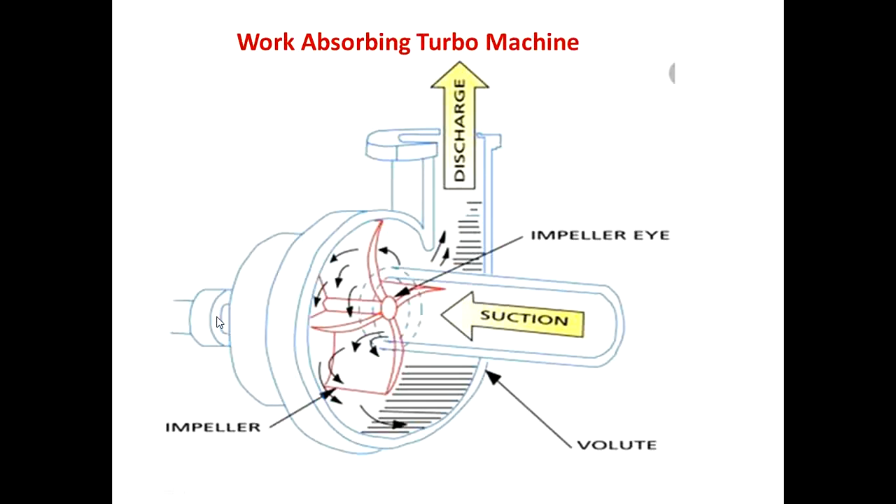But in case of a turbine, what happens? Fluid gives its energy and makes the turbine rotate. But here it is not the case. The machine element is rotating, and that rotating energy is converted into fluid energy. That's why it is called a work absorbing machine. Work absorption means absorbing in the shaft, work developed means work developed to the shaft. Here work is done on the fluid, that's why it is negative work.

This is the centrifugal pump sketch. This is a very important sketch, please note down this sketch properly. Pause the video and note down this sketch properly.

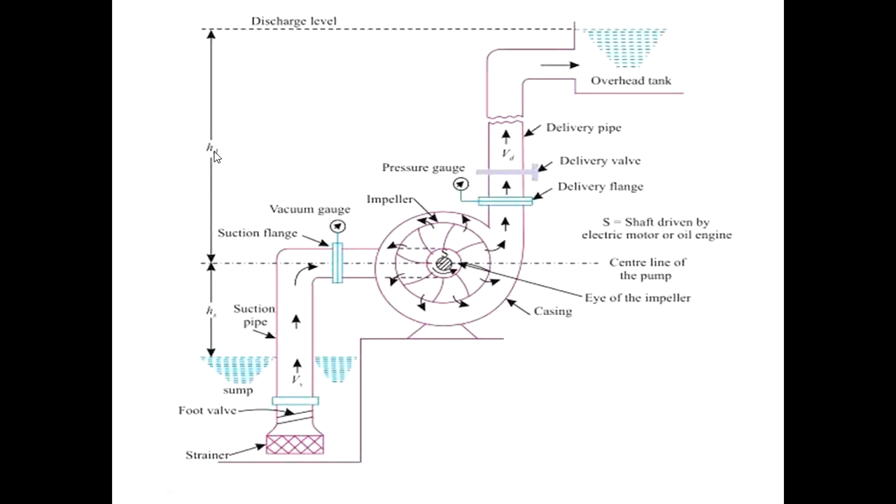It enters through the suction pipe. So up to there you have the water, this is the sump. Just observe this properly, dear students. Centrifugal pump is the key point to pass in examination. This is a very important topic, so you can pass easily, otherwise it's very difficult for you people. The suction pipe from the center of the eye to the tank is called HS, and this is HD, the delivery head. Note this sketch properly.

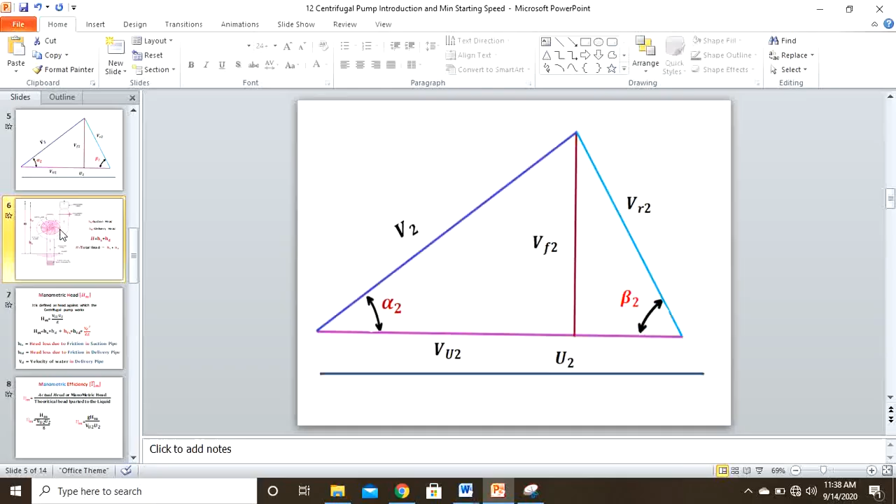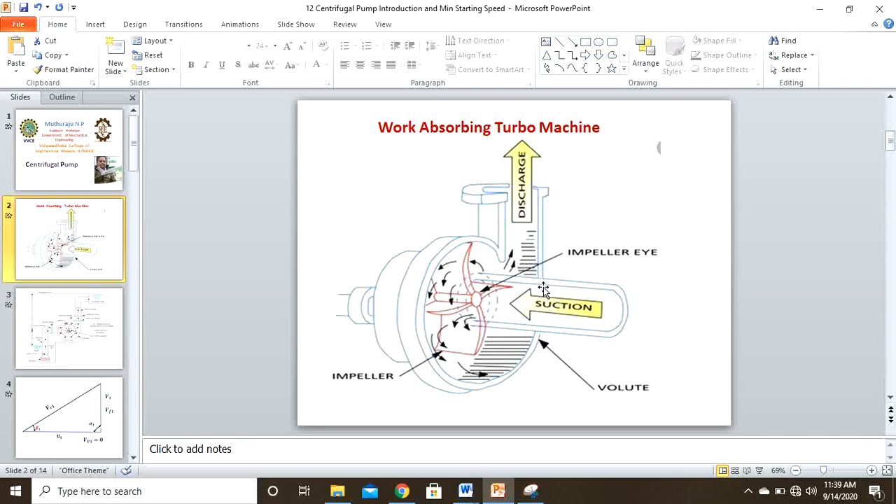This is the inlet velocity triangle, because inlet to the turbo machine, the suction is axial. Therefore this is axial inlet. Axially fluid is entering, that's why V1, the absolute velocity, is axial, and it will coincide with the flow velocity. Blade speed U1 will be there in this direction, both are at 90 degrees to each other. That's why this is the velocity triangle for your turbo machine. So alpha 1 is equal to 90 degrees, V1 is equal to VF1, VU1 is equal to 0.

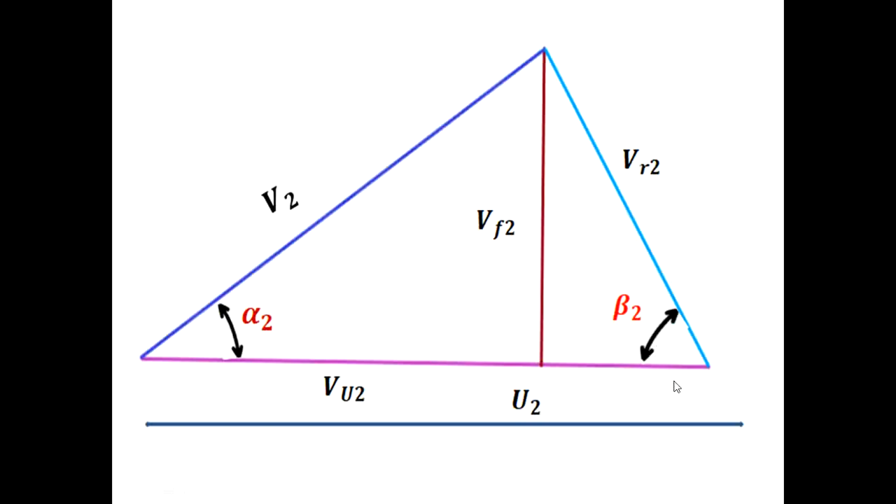VR1 as usual, beta 1 angle will be there, please note this one. U1 is the blade velocity at inlet. This is the exit velocity triangle, U2, the blade velocity at exit, is more than the inlet, and VU2 is less. So this is the exit velocity triangle with beta 2 angle. Please note down this velocity triangle properly.

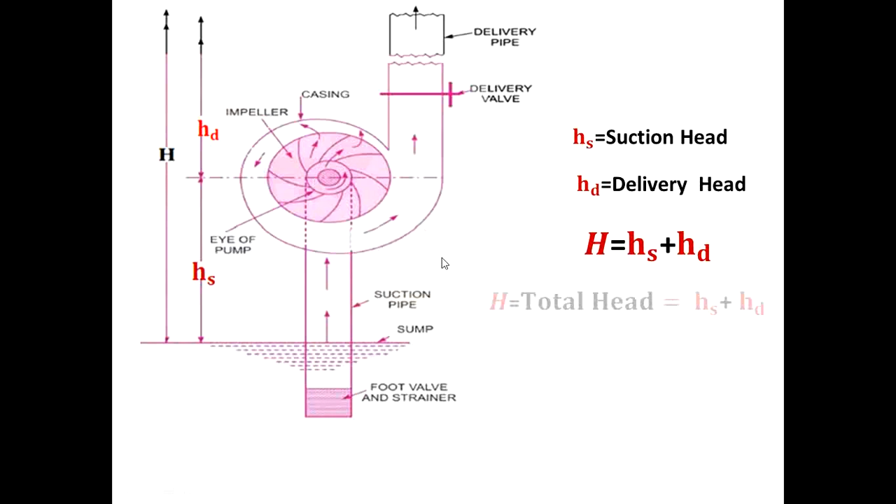From the point where you have the water up to the center of the eye, it is the suction head, above which you have the delivery head, up to here. Then your total head is equal to H: suction head HS plus delivery head equals total head. Manometric head is defined as the head against which the centrifugal pump works.

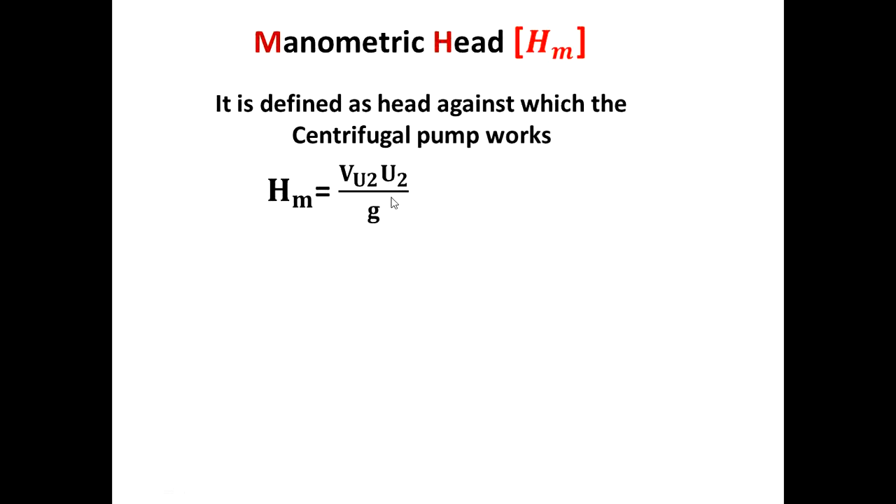Therefore your head is VU2 U2 divided by G. Sir, why is it VU2 U2 minus VU1 U1? In Euler's energy equation it's VU1 U1 minus VU2 U2, but here it is work done on the fluid, so it's negative work. When you multiply negative inside, it becomes VU2 U2 minus VU1 U1, but VU1 is equal to 0, that's why it is equal to VU2 U2 divided by G. This is the manometric head, you can write it like this also.

Another formula: suction head, delivery head, friction loss in the suction pipe, friction loss in the delivery pipe, plus velocity of the fluid at the delivery pipe squared divided by 2g.

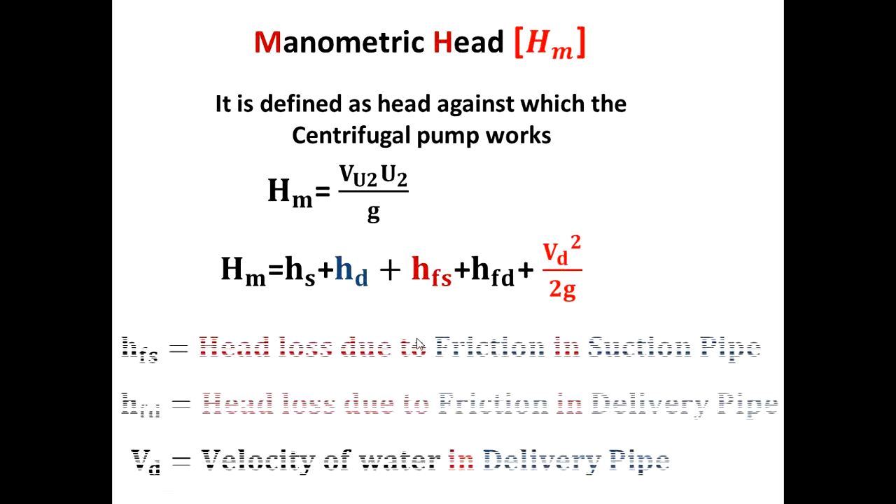This is the manometric head. In examination they will ask what is manometric head, the definition. At that time please write down this formula.

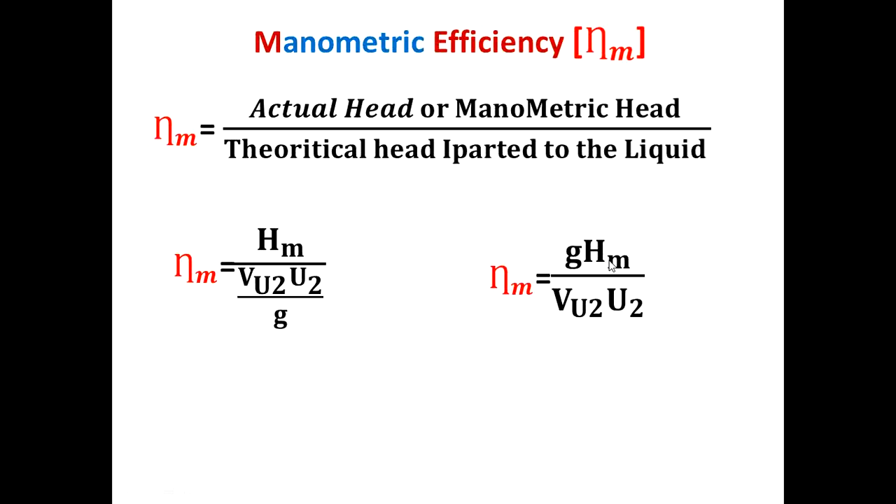Manometric efficiency is the efficiency defined by actual head or manometric head to the theoretical head imparted to the liquid. Therefore, manometric efficiency is equal to Hm into g divided by Vu into U2, and manometric efficiency is equal to g into manometric head divided by Vu into U2.

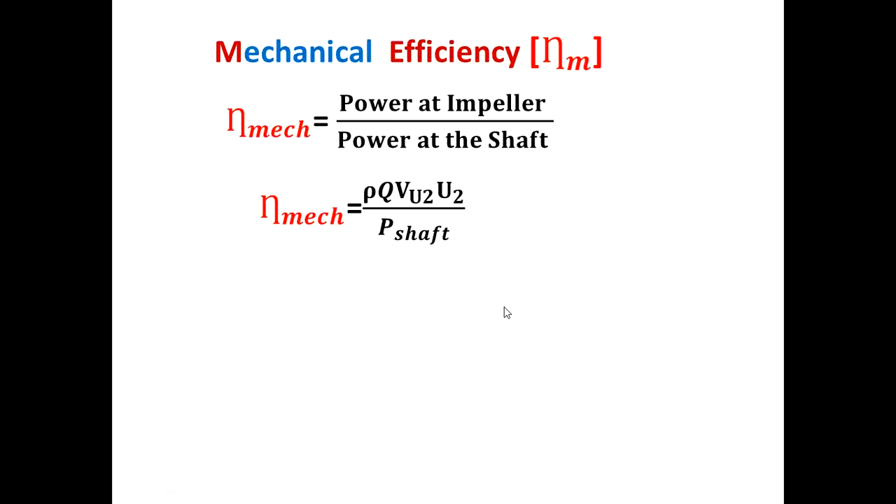Mechanical efficiency is equal to nu mechanical efficiency, power at impeller divided by power at the shaft. Nu mechanical efficiency is equal to rho Q Vu into U2 divided by P shaft.

Overall efficiency is equal to mechanical efficiency into manometric efficiency. Therefore, nu naught is equal to rho Q g manometric head divided by P shaft.

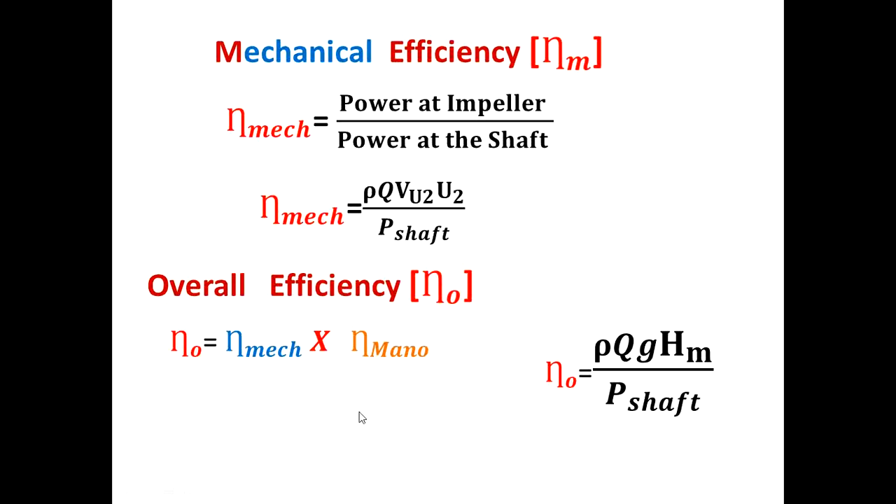Next, net positive suction head. The definition is the suction head at the impeller which represents the head required to make the fluid flow from the suction head to the pump impeller. Suction head is required, that's why you will do the priming.

Priming means adding water to the suction pipe and making that column clear with the fluid. That is the kind of thing they will ask in examination: what do you mean by priming. Priming is nothing but making this positive suction head to the suction pipe.

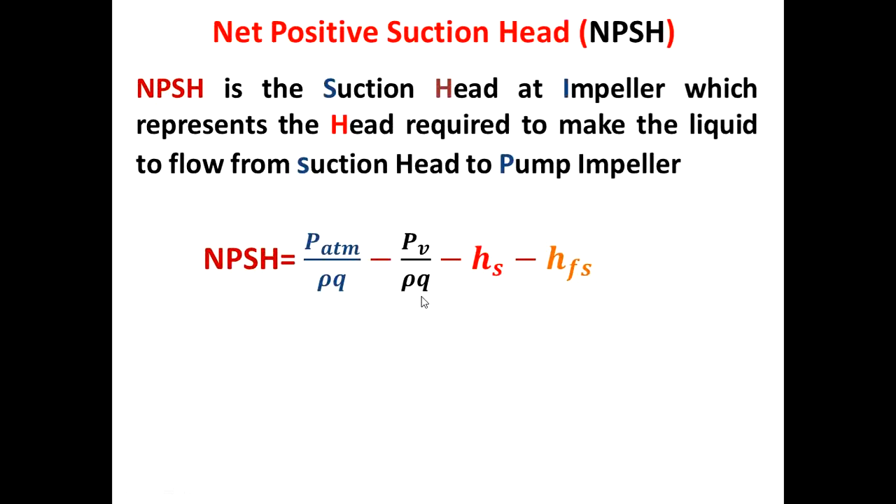Positive suction head to the suction pipe equals atmospheric pressure by rho g, minus vapor pressure by rho g in the pipe, and Hs minus Hfs.

Minimum starting speed of the centrifugal pump. This is a very important derivation. In examination they will ask this as a separate derivation.

The centrifugal pump starts to lift the water when the pressure rise in the impeller is more than or equal to the manometric head, which is the head against which the pump works. The pump must provide that much pressure, only then will water be lifted from the suction to the delivery pipe. So this should be more than or equal to the manometric head.

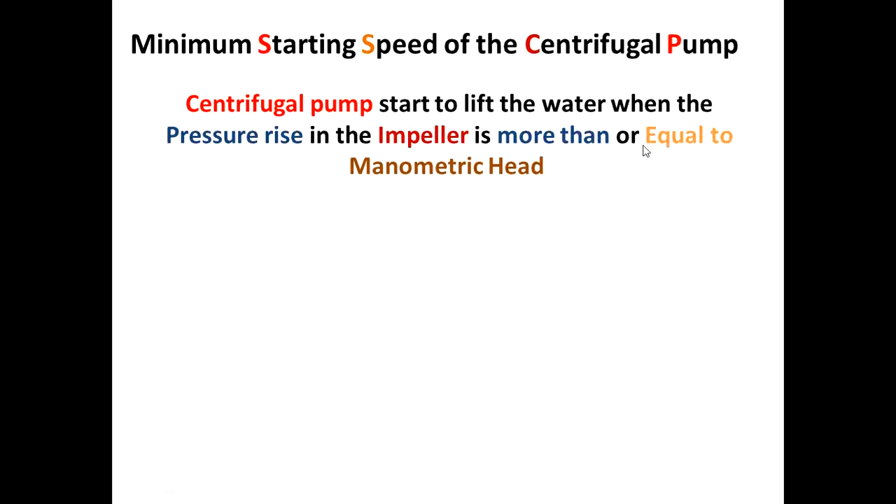Therefore your pressure rise in the pump is U2 squared minus U1 squared, divided by 2g. Note, in case of the turbine we used to write U1 squared minus U2 squared, but here it is U2 squared minus U1 squared divided by 2g.

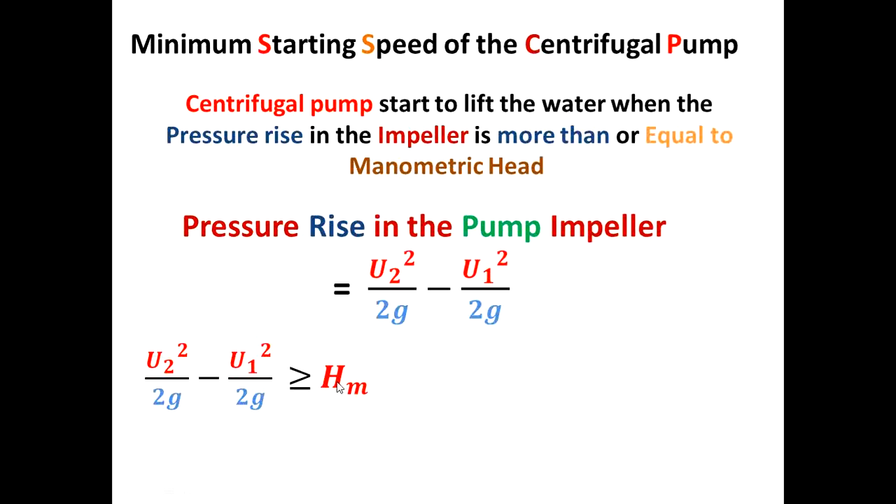This should be more than or equal to the manometric head, so therefore it is equal to the manometric head. I am equating the manometric head using the manometric efficiency formula already given, so manometric head equals... you cross multiply all these things and then rearrange.

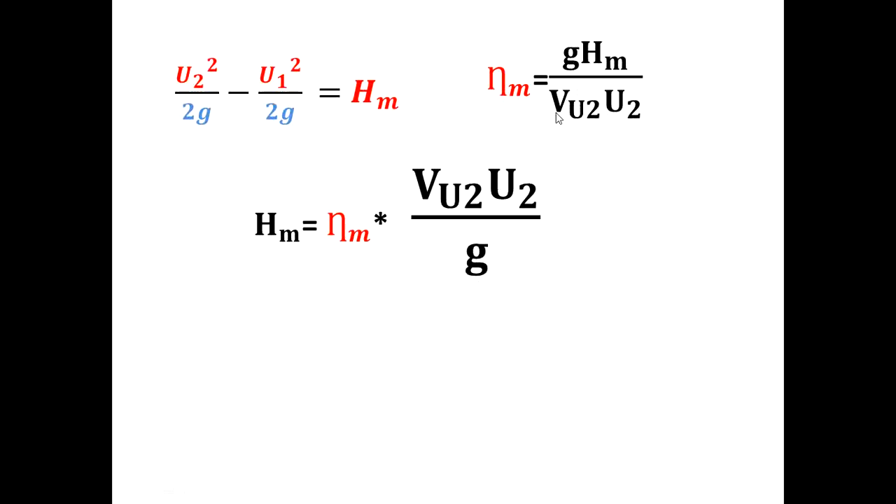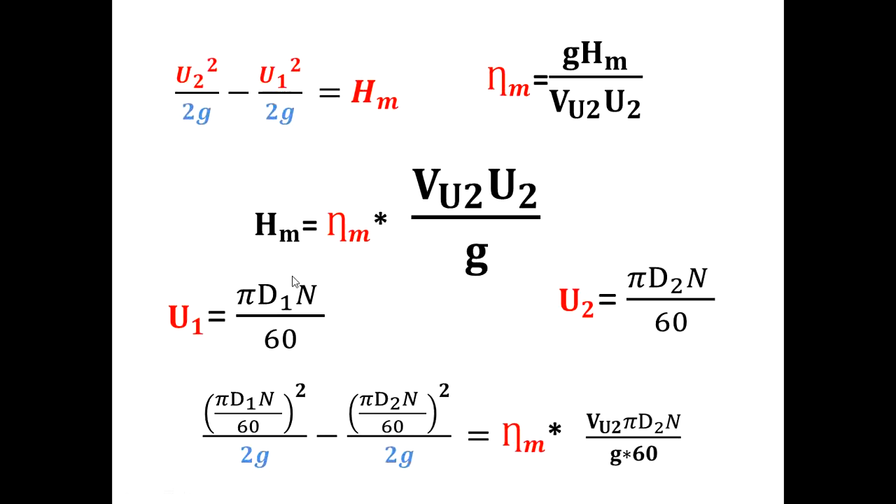Then manometric head H is equal to manometric efficiency into Vu2 into U2 divided by g, which becomes the denominator. U1 is equal to pi D1 N divided by 60, and U2 is equal to pi D2 N divided by 60. Put these values into this equation.

This equation will come out; rearrange it like this. On simplification you will get this equation, with 2g and pi n divided by 60 common, pi n divided by 60. This is the simplification.

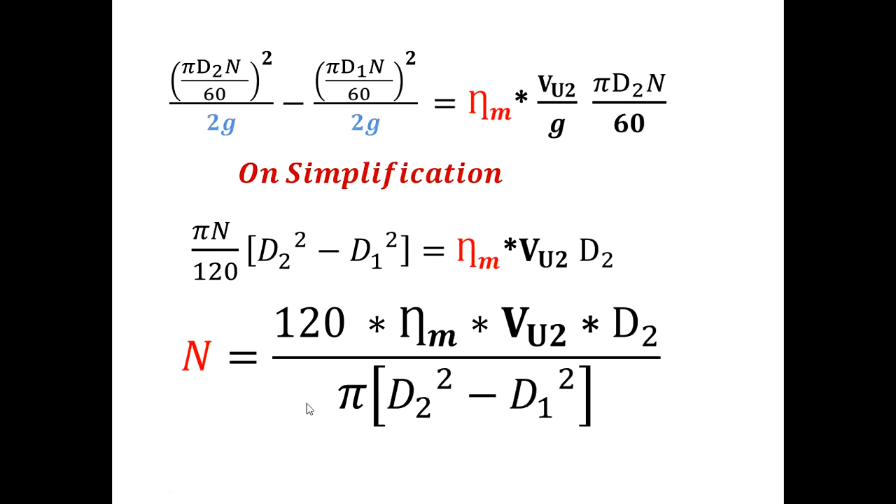Next, the speed for this turbo machine, the centrifugal pump - the minimum starting speed for the centrifugal pump is equal to this. So this is the derivation for minimum starting speed.